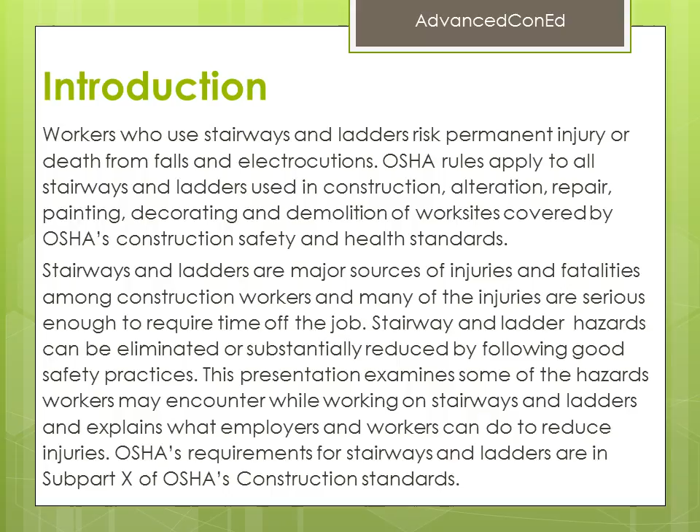Introduction continued. Falls from portable ladders - step, straight, combination, and extension - are one of the leading causes of occupational fatalities and injuries. Read and follow all labels and markings on the ladder. Avoid electrical hazards: look for overhead power lines before handling a ladder, and avoid using a metallic ladder near power lines or exposed energized electrical equipment.

Always inspect the ladder prior to using it. If the ladder is damaged, it must be removed from service and tagged until repaired or discarded. Do not use a self-supporting ladder, for example a step ladder, as a single ladder or in a partially closed position. Do not use the top step or rung of a ladder as a step or rung unless it was designed for that purpose.

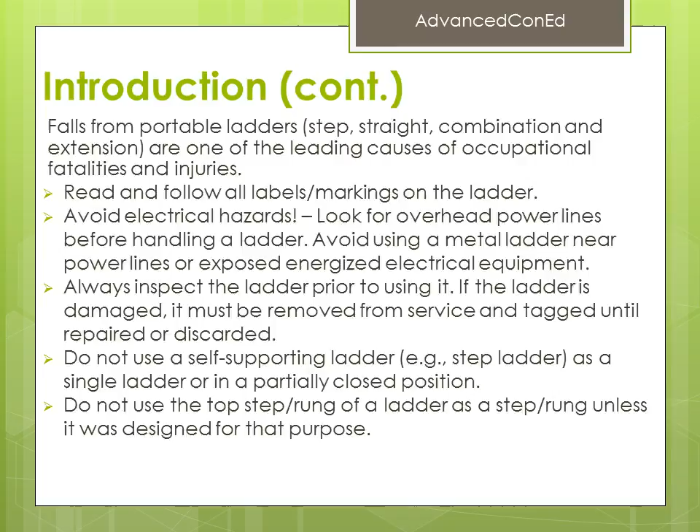Training requirements. Employers must train all employees to recognize hazards related to ladders and stairways and instruct them to minimize these hazards. For example, employers must ensure that each employee is trained by a competent person in the following areas, as applicable.

Nature of fall hazards in the work area; correct procedures for erecting, maintaining, and disassembling the fall protection systems to be used; proper construction, use, placement, and care and handling of all stairways and ladders; and maximum intended load carrying capacities of ladders used. Note: employers must retrain each employee as necessary to maintain their understanding and knowledge on safe use and construction of ladders and stairs.

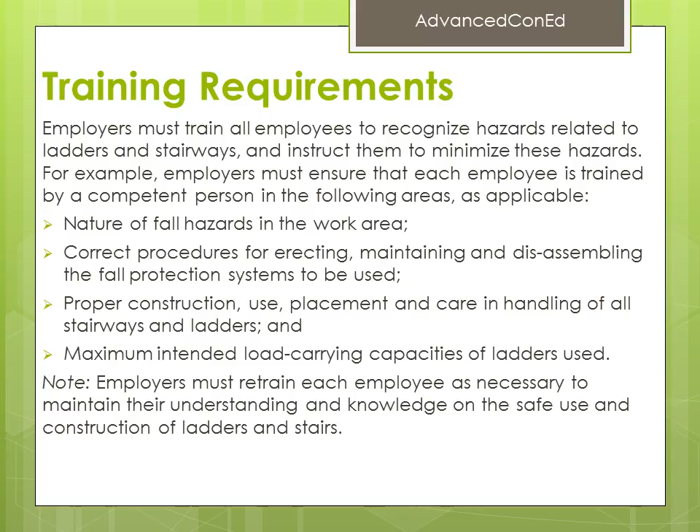Glossary. Cleat: a ladder crosspiece of rectangular cross-section placed on edge upon which a person may step while ascending or descending a ladder. Double cleat ladder: a ladder with a center rail to allow simultaneous two-way traffic for employees ascending or descending. Failure: load refusal, breakage, or separation of components.

Fixed ladder: a ladder that cannot be readily moved or carried because it is an integral part of a building or structure. Handrail: a rail used to provide employees with a handhold for support. Job-made ladder: a ladder that is fabricated by employees, typically at the construction site, non-commercially manufactured. Load refusal: the point where the structural members lose their ability to carry the load.

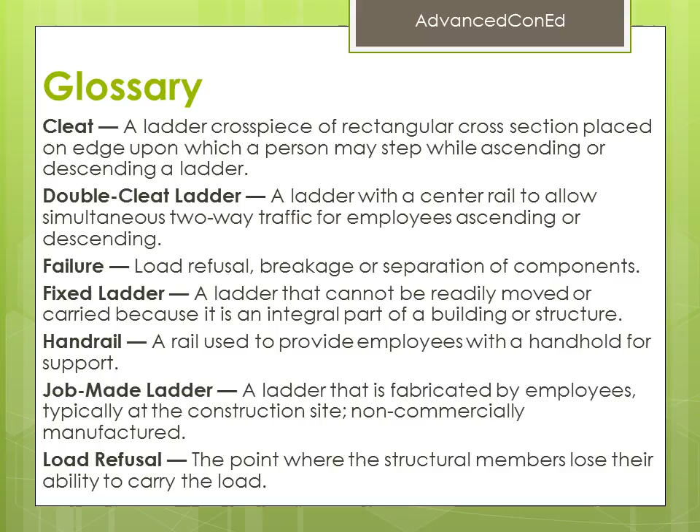Glossary continued. Point of access: all areas used by employees for work-related passage from one area or level to another. Portable ladder: a ladder that can be readily moved or carried. Riser height: the vertical distance from the top of a tread or platform/landing to the top of the next higher tread or platform/landing.

Sidestep fixed ladder: a fixed ladder requiring a person to step to the side of the ladder side rails to reach the landing. Single cleat ladder: a ladder consisting of a pair of side rails connected together by cleats, rungs, or steps. Stair rail system: a vertical barrier erected along the unprotected sides and edges of a stairway to prevent employees from falling to lower levels.

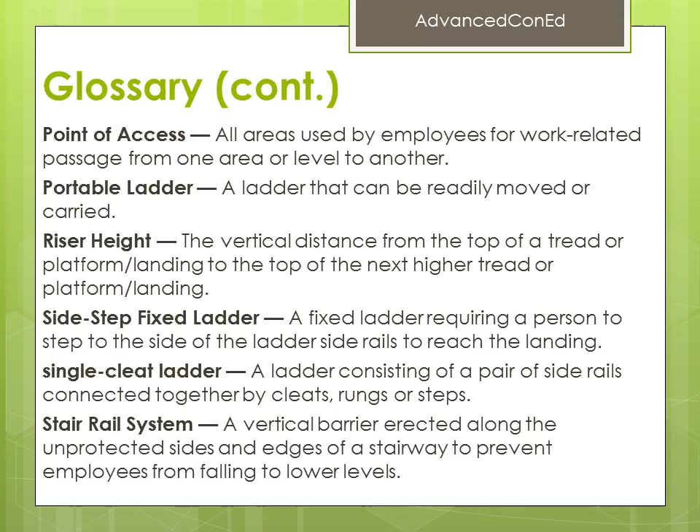Glossary continued. Temporary service stairway: a stairway where permanent treads and landings are to be filled in at a later date. Through fixed ladder: a fixed ladder that requires a person getting off at the top to step between the side rails of the ladder to reach the landing. Tread depth: the horizontal distance from the front to back of a tread, excluding nosing, if any.

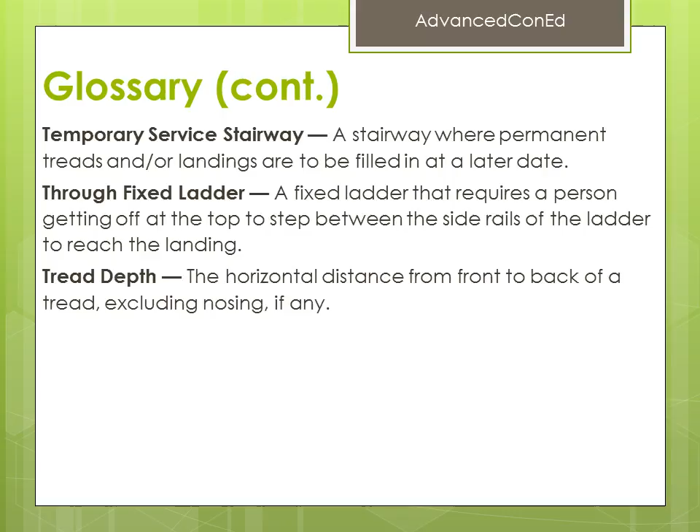General requirements. These rules specify when employers must provide stairways and ladders. In general, the standards require the following: when there is a break in elevation of 19 inches or more and no ramp, runway, embankment, or personnel hoist is available, employers must provide a stairway or ladder at all worker points of access.

When there is only one point of access between levels, employers must keep it clear of obstacles to permit free passage by workers. If free passage becomes restricted, employers must provide a second point of access and ensure that workers use it. When there are more than 2 points of access between levels, employers must ensure that at least one point of access remains clear.

Employers must install all stairway and ladder fall protection systems required by these rules and ensure that the worksite meets all requirements of the stairway and ladder rules before employees use stairways or ladders.

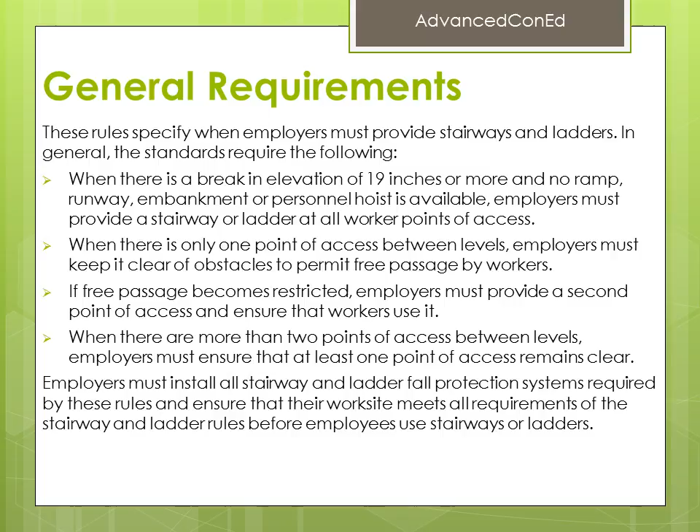General requirements continued. The following general requirements apply to all ladders, including ladders built at the job site. Double cleated ladders or 2 or more ladders must be provided when ladders are the only way to enter or exit a work area where 25 or more employees work, or when a ladder services simultaneous two-way traffic. Ladder rungs, cleats, and steps must be parallel, level, and uniformly spaced when the ladder is in position for use.

Rungs, cleats, and steps of portable and fixed ladders, except as provided below, must not be spaced less than 10 inches apart, nor more than 14 inches apart along the ladder's side rails. Rungs, cleats, and steps of step stools must not be less than 8 inches apart, nor more than 12 inches apart, between the center lines of the rungs, cleats, and steps.

Rungs, cleats, and steps at the base section of extension trestle ladders must not be less than 8 inches nor more than 18 inches apart between the center lines of the rungs, cleats, and steps. The rung spacing on the extension section must not be less than 6 inches nor more than 12 inches.

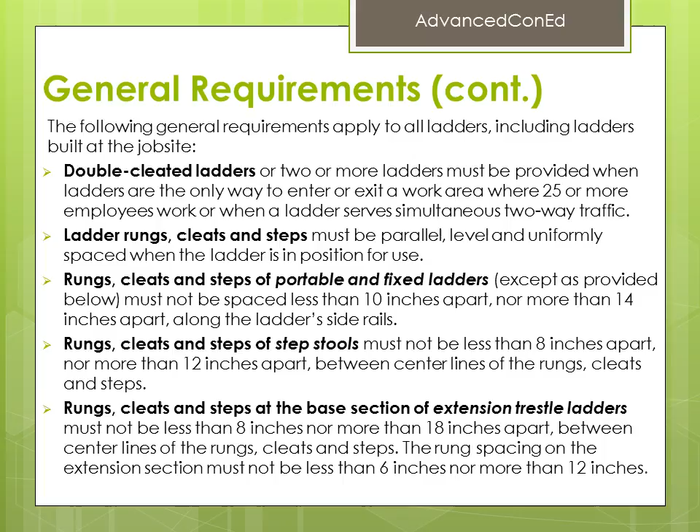General requirements continued. The following general requirements apply to all ladders, including ladders built at the job site. Double cleated ladders or two or more ladders must be provided when ladders are the only way to enter or exit a work area where 25 or more employees work, or when a ladder serves simultaneous two-way traffic. Ladder rungs, cleats, and steps must be parallel, level, and uniformly spaced when the ladder is in position for use.

Rungs, cleats, and steps of portable and fixed ladders, except as provided below, must not be spaced less than 10 inches apart, nor more than 14 inches apart along the ladder's side rails. Rungs, cleats, and steps of step stools must not be less than 8 inches apart, nor more than 12 inches apart, between the center lines of the rungs, cleats, and steps.

Rungs, cleats, and steps at the base section of extension trestle ladders must not be less than 8 inches nor more than 18 inches apart between the center lines of the rungs, cleats, and steps. The rung spacing on the extension section must not be less than 6 inches nor more than 12 inches.

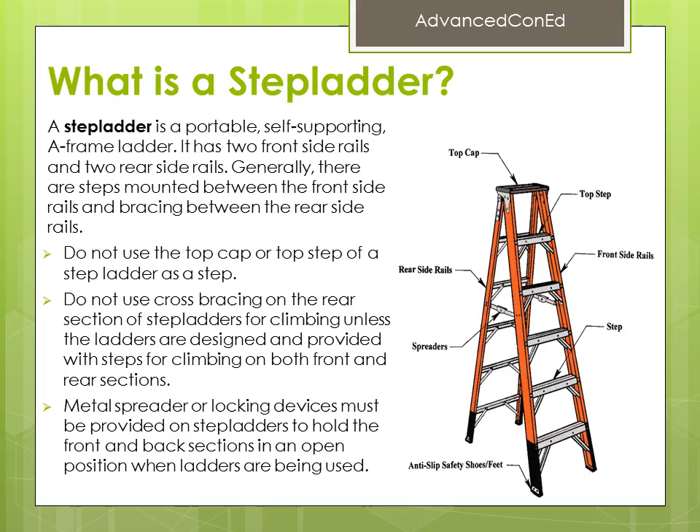Common stepladder hazards: damaged stepladder, ladders on slippery or unstable surface, unlocked ladder spreaders, standing on the top step or top cap, loading a ladder beyond rated load, ladders in high traffic location, reaching outside ladder side rails, ladders in close proximity to electrical wiring or equipment.

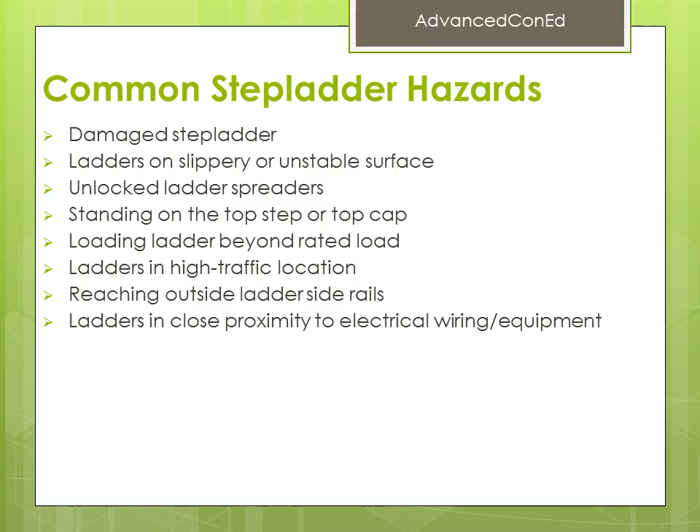What is an extension ladder? Also known as portable ladders, extension ladders usually have two sections that operate in brackets or guides, allowing for adjustable lengths. Because extension ladders are not self-supporting, they require a stable structure that can withstand the intended load.

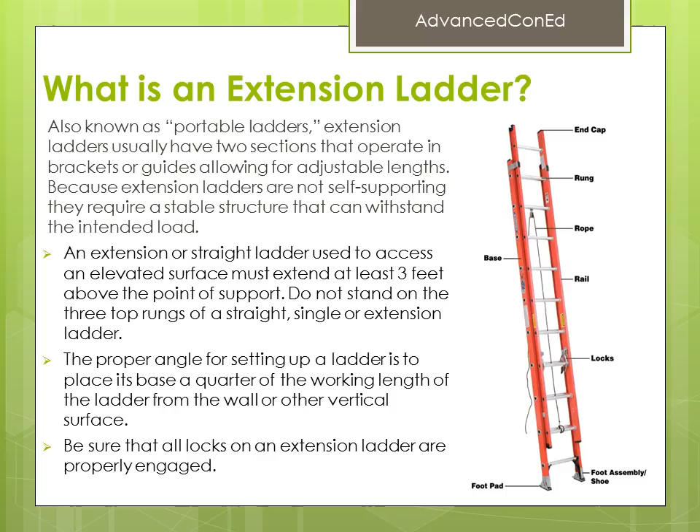An extension or straight ladder used to access an elevated surface must extend at least 3 feet above the point of support. Do not stand on the top 3 rungs of a straight, single, or extension ladder. The proper angle for setting up a ladder is to place its base a quarter of the working length of the ladder from the wall or other vertical surface. Be sure that all locks on an extension ladder are properly engaged.

Common extension ladder hazards: damaged cleat or rail, ladders placed on slippery or unstable surface, not extending the ladder 3 feet above the landing surface, not properly setting the ladder with its base a quarter of the working length of the ladder from the wall or other vertical surface.

Unsecured locks. Standing on the top 3 cleats. Loading ladder beyond rated load. Ladders in high traffic locations. Reaching outside ladder side rails. Ladders in close proximity to electrical wiring or equipment.

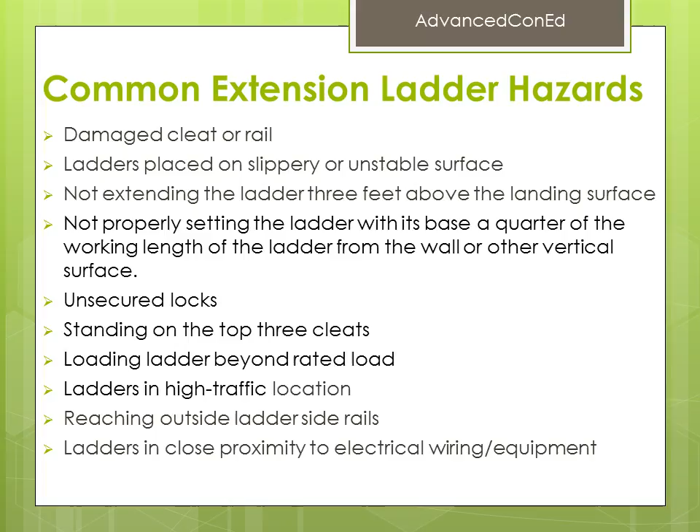Rules for ladders. All ladders. The following rules apply to all ladders. Do not use single rail ladders. Maintain ladders free of oil, grease, and other slipping hazards. Do not load ladders beyond their maximum intended load, nor beyond their manufacturer's rated capacity.

Use ladders only for their designed purpose. Use ladders only on stable and level surfaces, unless secured to prevent accidental movement. Do not use ladders on slippery surfaces unless secured or provided with slip-resistant feet to prevent accidental movement. Do not use slip-resistant feet as a substitute for exercising care when placing, lashing, or holding a ladder upon slippery surfaces.

Secure ladders placed in areas such as passageways, doorways, or driveways, or where they can be displaced by workplace activities or traffic, to prevent accidental movement. Or use a barricade to keep traffic or activity away from the ladder.

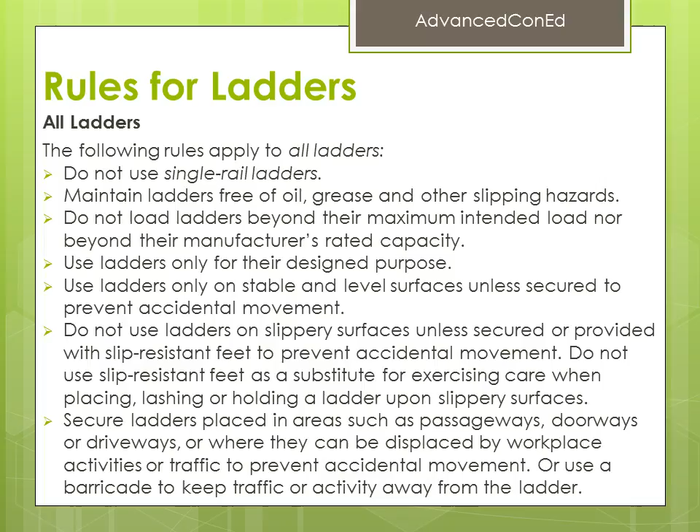Rules for ladders continued. Keep areas clear around the top and bottom of ladders. Use ladders equipped with non-conductive side rails if the worker or the ladder could contact exposed energized electrical equipment. Face the ladder when moving up or down. Use at least one hand to grasp the ladder when climbing. Do not carry objects or loads that could cause a loss of balance and falling. Use ladders and appropriate accessories only for their designed purposes.

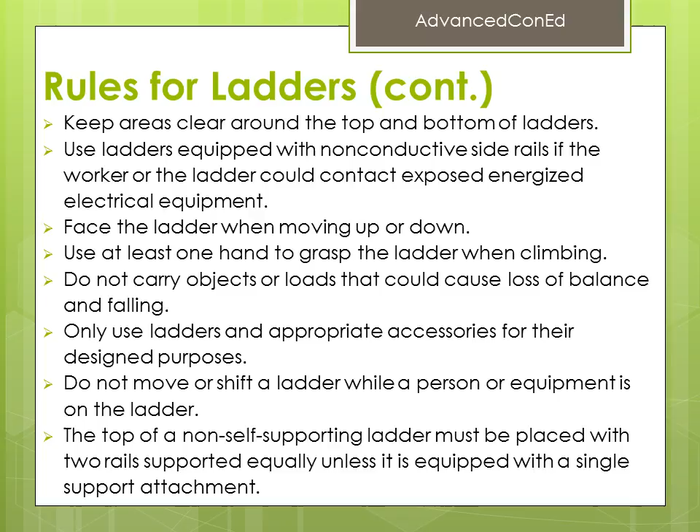Do not move or shift a ladder while a person or equipment is on the ladder. The top of a non-self-supporting ladder must be placed with 2 rails supported equally, unless it is equipped with a single support attachment.

Rules for ladders continued. Ladders must not be tied or fastened together to create longer sections unless they are specifically designed for such use. When splicing side rails, the resulting side rail must be equivalent in strength to a one-piece side rail made of the same material.

2 or more separate ladders used to reach an elevated work area must be offset with a platform or landing between the ladders, except when portable ladders are used to gain access to fixed ladders. Ladder components must be surfaced to prevent snagging of clothing and injury from punctures or lacerations.

Wood ladders must not be coated with any opaque covering except for identification or warning labels, which may be placed only on the face of a side rail. A competent person must inspect ladders for visible defects periodically and after any incident that could affect their safe use.

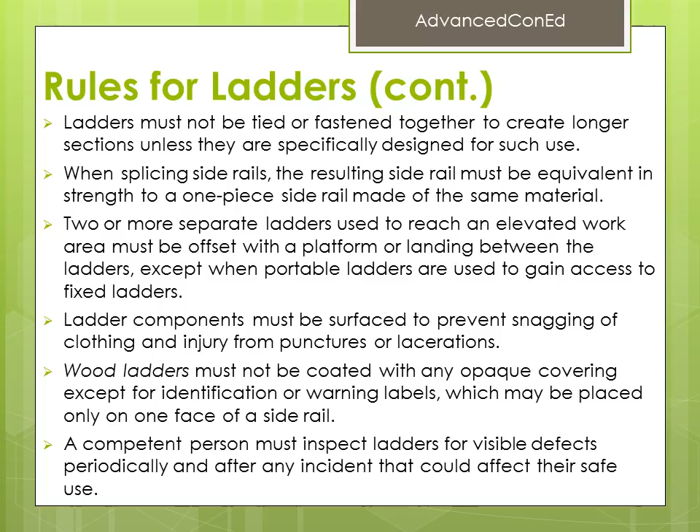Rules for ladders continued. The minimum clear distance between side rails for all portable ladders is 11.5 inches. The rungs and steps of portable metal ladders must be corrugated, knurled, dimpled, coated with a skid-resistant material, or treated to minimize slipping.

Non-self-supporting and self-supporting portable ladders must support at least 4 times the maximum intended load. Extra heavy-duty type 1A metal or plastic ladders must sustain 3.3 times the maximum intended load.

When portable ladders are used for access to an upper landing surface, the side rails must extend at least 3 feet above the upper landing surface. When such an extension is not possible, the ladder must be secured and a grasping device such as a grab rail must be provided to assist workers in mounting and dismounting the ladder. A ladder extension must not deflect under a load that would cause the ladder to slip off its supports.

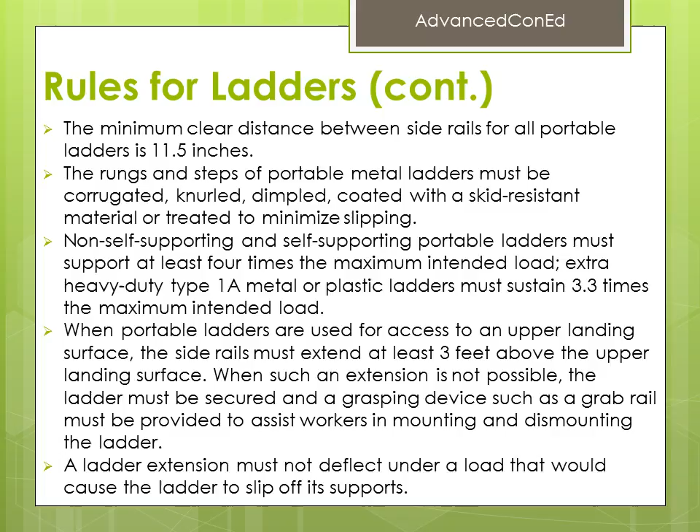Rules for ladders continued. Fixed ladders. If the total length of the climb on a fixed ladder equals or exceeds 24 feet, the ladder must be equipped with ladder safety devices or self-retracting lifelines and rest platforms at intervals not to exceed 150 feet, or a cage or well and multiple ladder sections, with each ladder section not to exceed 50 feet in length.

These ladder sections must be offset from adjacent sections, and landing platforms must be provided at maximum intervals of 50 feet. In addition, fixed ladders must meet the following requirements. Fixed ladders must be able to support at least 2 loads of 250 pounds each, concentrated between any 2 consecutive attachments. Fixed ladders must also support added anticipated loads caused by ice buildup, winds, rigging, and impact loads resulting from ladder safety devices.

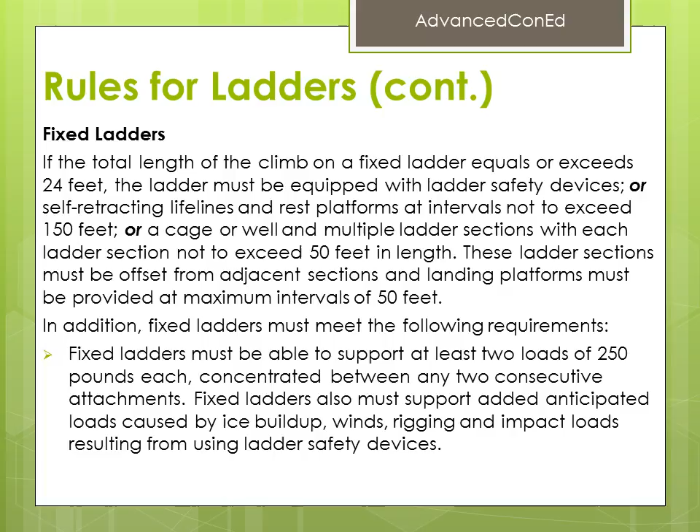Rules for ladders continued. Fixed ladders continued. Individual rung/step ladders must extend at least 42 inches above an access level or landing platform, either by the continuation of the rung spacing as horizontal grab bars or by providing vertical grab bars that must have the same lateral spacing as the vertical legs of the ladder rails.

Each step or rung of a fixed ladder must be able to support a load of at least 250 pounds applied in the middle of the step or rung. Minimum clear distance between the sides of individual rung/step ladders and between the side rails of other fixed ladders must be 16 inches. Rungs of individual rung/step ladders must be shaped to prevent slipping off the end of the rungs.

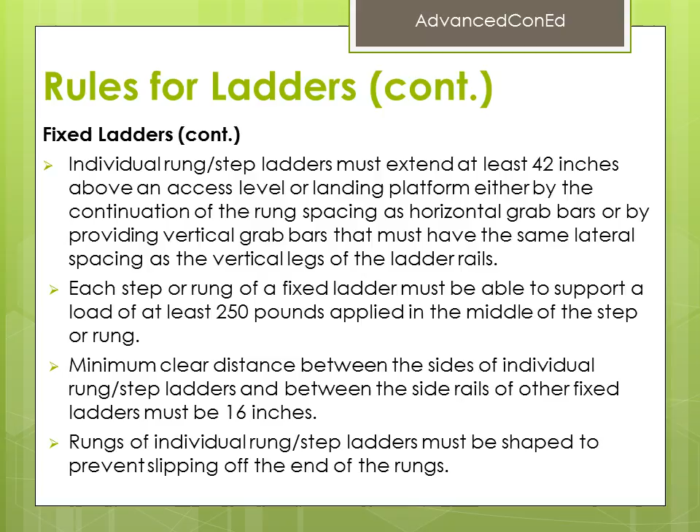Rules for ladders continued. Fixed ladders continued. Rungs and steps of fixed metal ladders must be corrugated, knurled, dimpled, coated with skid-resistant material, or treated to minimize slipping.

Minimum perpendicular clearance between fixed ladder rungs, cleats, and steps and any obstructions behind the ladder must be 7 inches, except that the clearance for an elevator pit ladder must be 4.5 inches.

Minimum perpendicular clearance between the center line of fixed ladder rungs, cleats, and steps and any obstruction on the climbing side of the ladder must be 30 inches. If obstructions are unavoidable, clearance may be reduced to 24 inches, provided a deflection device is installed to guide the worker around the obstruction.

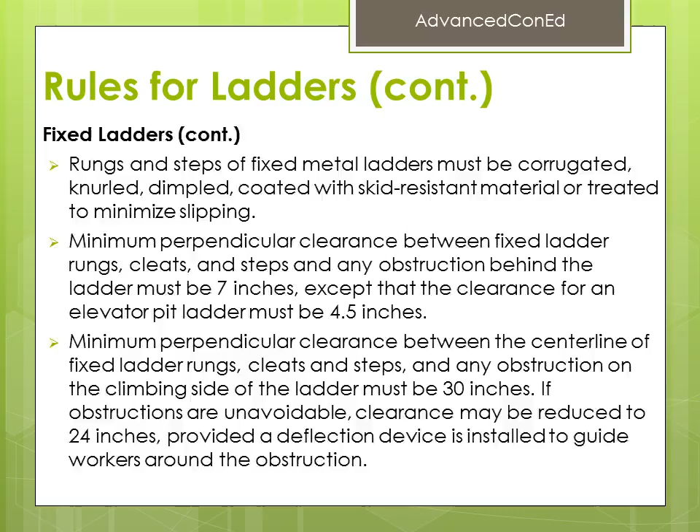Rules for ladders continued. Fixed ladders continued. Step across distance between the center of the steps or rungs of fixed ladders and the nearest edge of a landing area must be no less than 7 inches and no more than 12 inches. A landing platform must be provided if the step across distance exceeds 12 inches.

Fixed ladders without cages or wells must have at least a 15-inch clearance width to the nearest permanent object on each side of the center line of the ladder.

Fixed ladders must be provided with cages, wells, ladder safety devices, or self-retracting lifelines where the length of the climb is less than 24 feet, but the top of the ladder is at a distance greater than 24 feet above the lower levels.

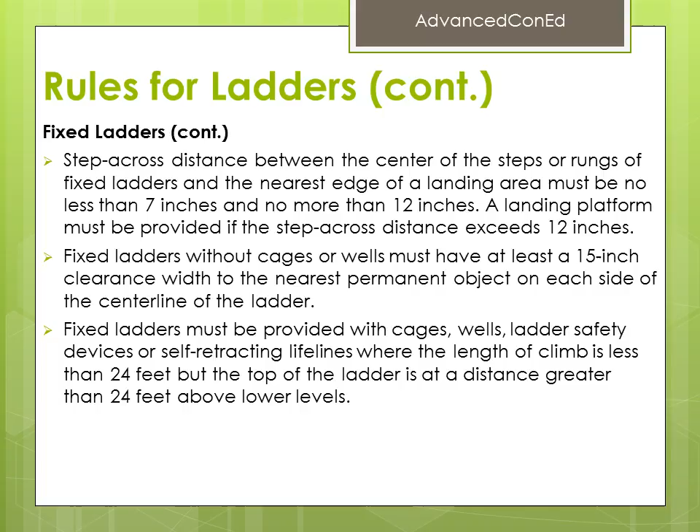Rules for ladders, continued. Fixed ladders, continued. Parapet ladders must have an access level at the roof if the parapet is cut to permit passage through it. If the parapet is continuous, the access level is the top of the parapet.

Steps or rungs for through fixed ladder extensions must be omitted from the extension, and the extension of the side rails must be flared to provide between 24 inches and 30 inches clearance between the side rails. When safety devices are provided, the maximum clearance distance between the side rail extensions must not exceed 36 inches.

Fixed ladders must be used at a pitch no greater than 90 degrees from the horizontal, measured from the back side of the ladder.

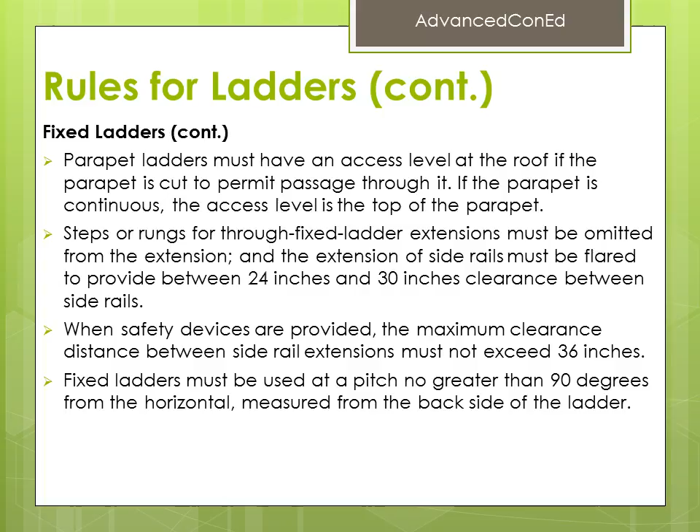Cages for fixed ladders. The requirements for cages for fixed ladders are as follows. Horizontal bands must be fastened to the side rails of rail ladders or directly to the structure, building, or equipment for individual rung ladders. Vertical bars must be on the inside of the horizontal bands and must be fastened to them.

Cages must not extend less than 27 inches or more than 30 inches from the center line of the step or rung and must not be less than 27 inches wide. Insides of cages must be clear of projections.

Horizontal bands must be spaced at intervals not more than 4 feet apart, measured from the center line to center line.

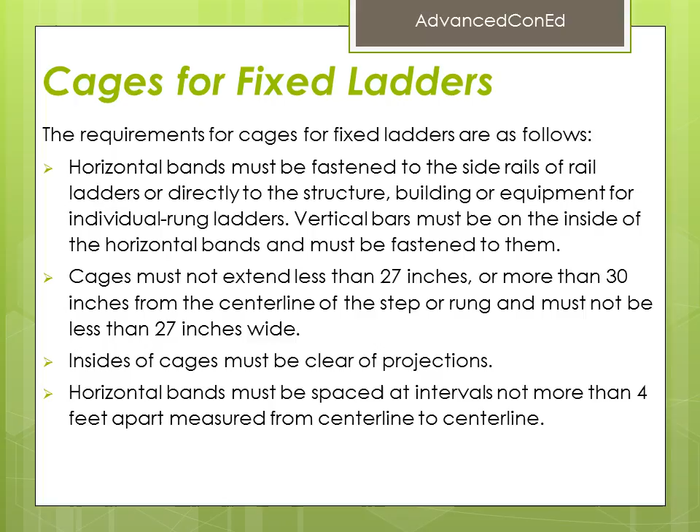Cages for fixed ladders, continued. Vertical bars must be spaced at intervals not more than 9.5 inches, measured center line to center line.

Bottoms of cages must be between 7 feet and 8 feet above the point of access to the bottom of the ladder. The bottom of the cage must be flared not less than 4 inches between the bottom horizontal band and the next higher band.

Tops of cages must be a minimum of 42 inches above the top of the platform or point of access at the top of the ladder. There must be a way to access the platform or other point of access.

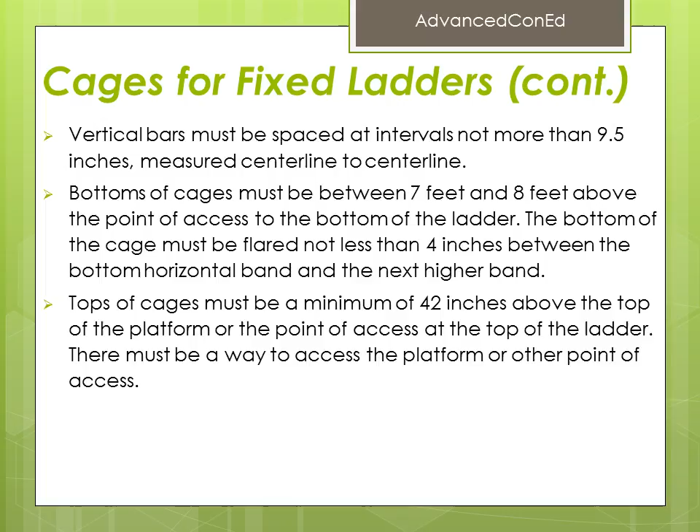Wells for fixed ladders. The requirements for wells for fixed ladders are as follows. Wells must completely encircle the ladder and must be free of projections. Inside faces of wells on the climbing side of the ladder must extend between 27 inches and 30 inches from the center line of the step or rung.

Inside widths of wells must be at least 30 inches. Bottoms of wells above the point of access to the bottom of the ladder must be between 7 feet and 8 feet.

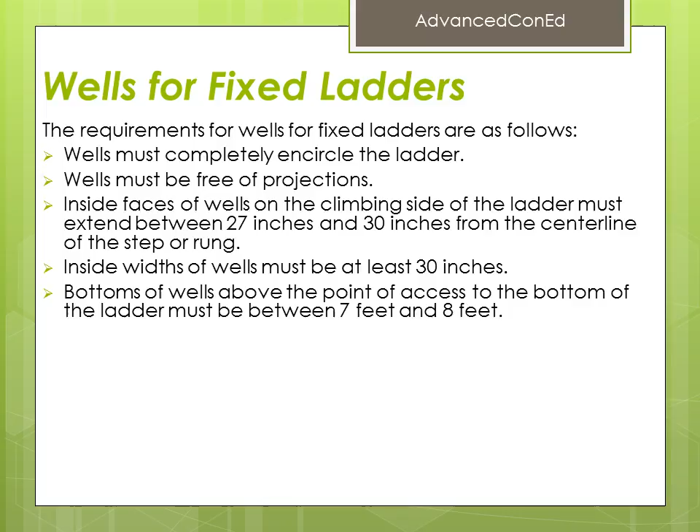Ladder safety devices and related support systems for fixed ladders. The connection between the carrier or lifeline and the point of attachment to the body belt or harness must not exceed 9 inches in length.

In addition, ladder safety devices and related support systems on fixed ladders must conform to the following. All safety devices must be able to withstand, without failure, a drop test consisting of a 500-pound weight dropping 18 inches. All safety devices must permit the worker to ascend or descend without continually having to hold, push, or pull any part of the device, leaving both hands free for climbing.

All safety devices must be activated within 2 feet after a fall occurs and limit the descending velocity of an employee to 7 feet per second or less.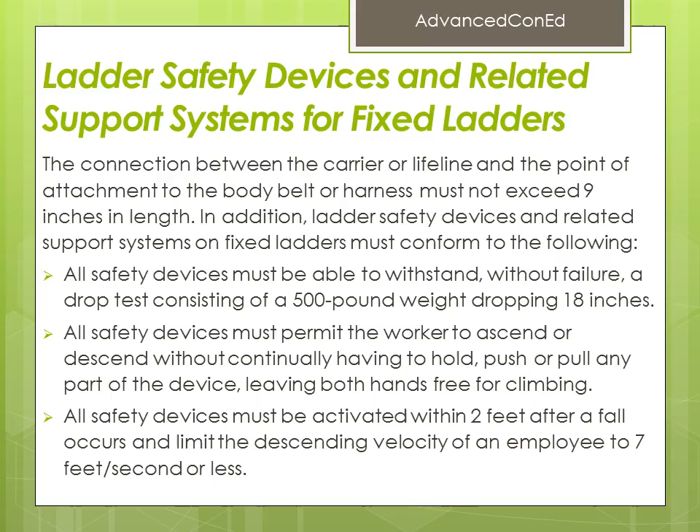Requirements for mounting ladder safety devices for fixed ladders are as follows. Mounting for rigid carrier must be attached at each end of the carrier, with intermediate mounting spaced along the entire length of the carrier to provide the necessary strength to stop workers' falls.

Mounting for flexible carriers must be attached at each end of the carrier. Cable guides for flexible carriers must be installed with a spacing between 25 feet and 40 feet along the entire length of the carrier to prevent wind damage to the system.

Design and installation of mountings and cable guides must not reduce the strength of the ladder. Side rails and steps or rungs for side step fixed ladders must be continuous in extension.

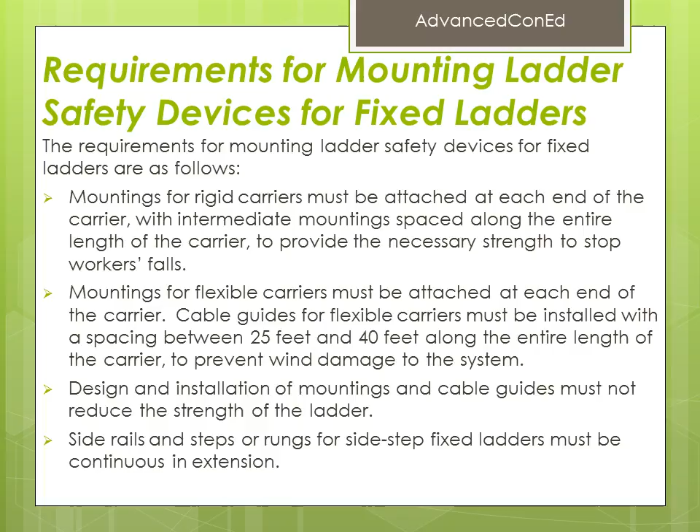Defective ladders. Ladders needing repairs are subject to the following rules. Portable ladders with structural defects, such as broken or missing rungs, cleats, or steps, broken or split rails, corroded components, or other faulty or defective components, must be immediately marked as defective or tagged with "Do Not Use" or similar language and withdrawn from service until repaired.

Fixed ladders with structural defects, such as broken or missing rungs, cleats, or steps, broken or split rails, or corroded components, must be withdrawn from service until repaired.

Defective fixed ladders are considered withdrawn from use when they are immediately tagged with "Do Not Use" or similar language, or marked in a manner that identifies them as defective or blocked, such as with a plywood attachment that spans several rungs.

Ladder repairs must restore the ladder to a condition meeting its original design criteria before the ladder is returned to use.

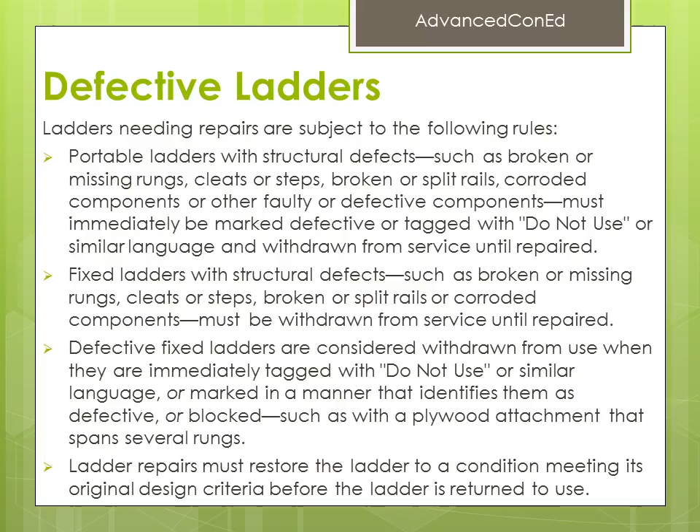Rules for stairways. The rules covering stairways and their components generally depend on how and when stairs are used. Specifically, there are rules for stairs used during construction and stairs used temporarily during construction, as well as rules governing stair rails and handrails.

Stairways used during construction. The following requirements apply to all stairways used during construction. Stairways that will not be a permanent part of the building under construction must have landings at least 30 inches deep and 22 inches wide at every 12 feet or less of vertical rise. Stairways must be installed between 30 degrees and 50 degrees from the horizontal.

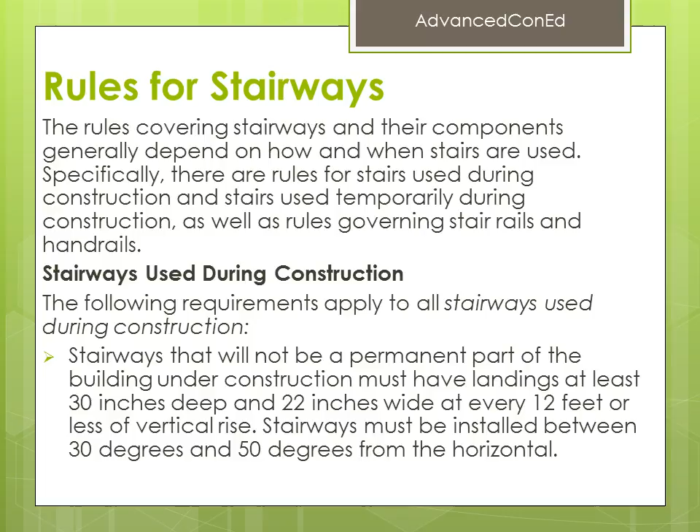Rules for stairways continued. Stairways used during construction continued. Variation in riser height or stair tread depth must not exceed 1/4 inch in any stairway system, including any foundation structure used as one or more treads of the stairs.

Doors and gates opening directly onto a stairway must have a platform that extends at least 20 inches beyond the swing of the door or gate. Metal pan landings and metal pan treads must be secured in place before filling.

Stairway parts must be free of dangerous projections, such as protruding nails. Slippery conditions on stairways must be corrected. Workers must not use spiral stairways that will not be part of a permanent part of the structure.

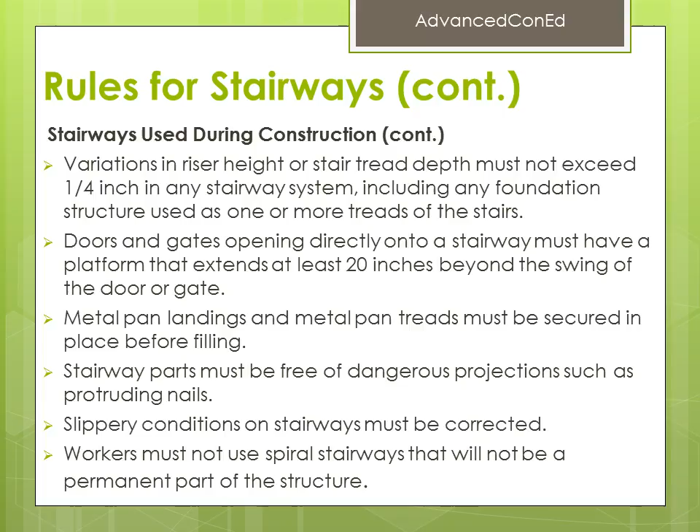Rules for stairways continued. Temporary stairs. The following requirements apply to stairways used temporarily during construction. Except during construction of the stairway, do not use stairways with metal pan landings or treads if the treads and/or landings have not been filled in with concrete or other materials, unless the pans of the stairs and/or landings are temporarily filled in with wood or other materials.

All treads and landings must be replaced when worn below the top edge of the pan. Do not use skeleton metal frame structures and steps where the treads and/or landings will be installed later, unless the stairs are fitted with secured temporary treads or landings.

Note: temporary treads must be made of wood or other solid material and installed full width and depth of the stair.

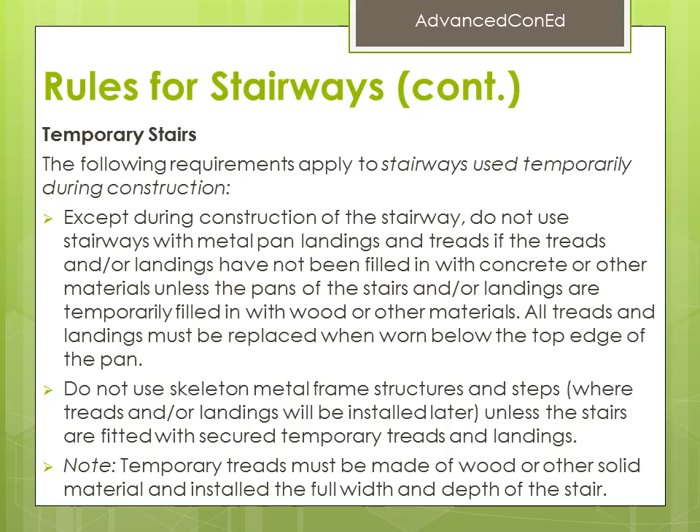Rules for stairways continued. Stair rails. The following general requirements apply to all stair rails. Stairways with 4 or more risers or rising more than 30 inches in height, whichever is less, must have a stair rail system installed along each unprotected side or edge.

Stair rails must not be less than 36 inches in height. The top edge of a handrail must be between 36 inches and 37 inches from the upper surface of the tread.

Stair rail systems and handrails must be surfaced to prevent injuries such as punctures or lacerations and to keep clothing from snagging.

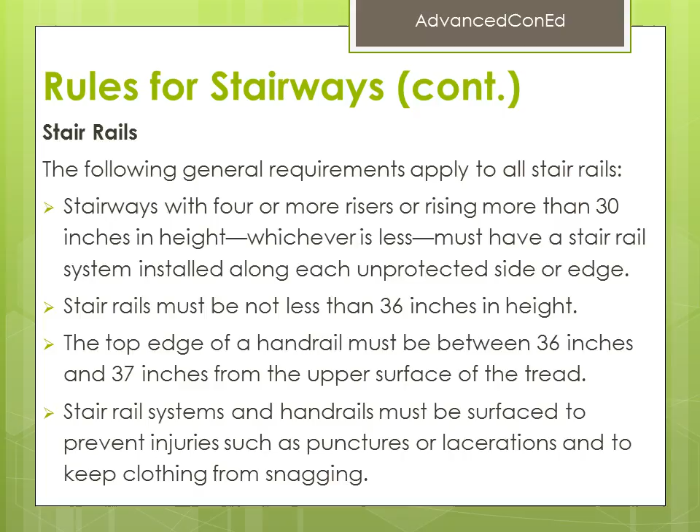Rules for stairways continued. Stair rails continued. The ends of stair rail systems and handrails must be built to prevent dangerous projections such as rails protruding beyond the end post of the system.

Unprotected sides and edges of stairway landings must have standard 42-inch guardrail systems. Intermediate vertical members, such as balusters used as guardrails, must not be more than 19 inches apart. Other intermediate structural members, when used, must be installed so that no openings are more than 19 inches wide.

Screens or mesh, when used, must extend from the top rail to the stairway step and along the opening between the top rail supports.

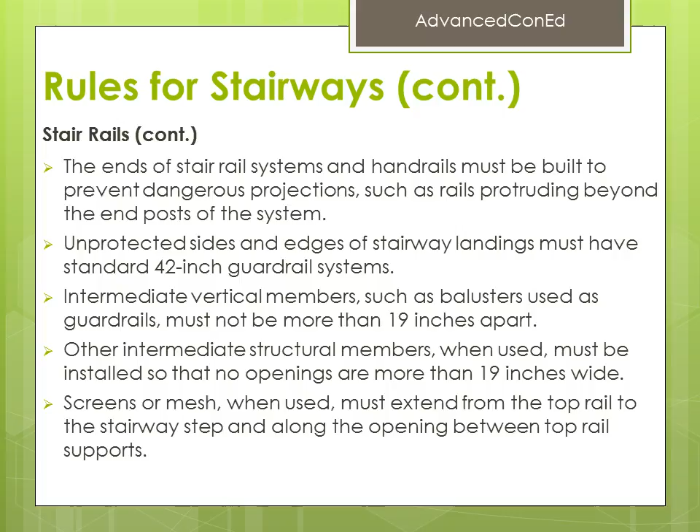Rules for stairways continued: handrails. Requirements for handrails are as follows.

Handrails and top rails of stair rail systems must be able to withstand, without failure, at least 200 pounds of force applied within 2 inches of the top edge in any downward or outward direction at any point along the top edge.

Handrails must not be more than 37 inches high, nor less than 30 inches from the upper surface of the handrail to the surface of the tread.

Handrails must provide an adequate handhold for employees to grasp to prevent falls. Temporary handrails must have a minimum clearance of 3 inches between the handrail and walls, stair rail systems, and other objects.

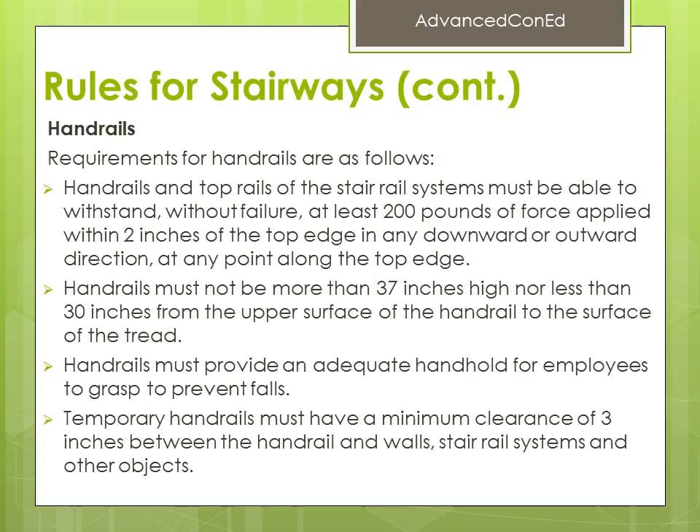Rules for stairways continued: handrails continued. Stairways with 4 or more risers, or that rise more than 30 inches in height, whichever is less, must have at least one handrail. Winding or spiral stairways must have a handrail to prevent use of areas where the tread width is less than 6 inches.

Midrails. Midrails, screens, mesh, intermediate vertical members, or equivalent intermediate structural members must be provided between the top rail and stairway steps to the stair rail system. When midrails are used, they must be located midway between the top of the stair rail system and the stairway steps.

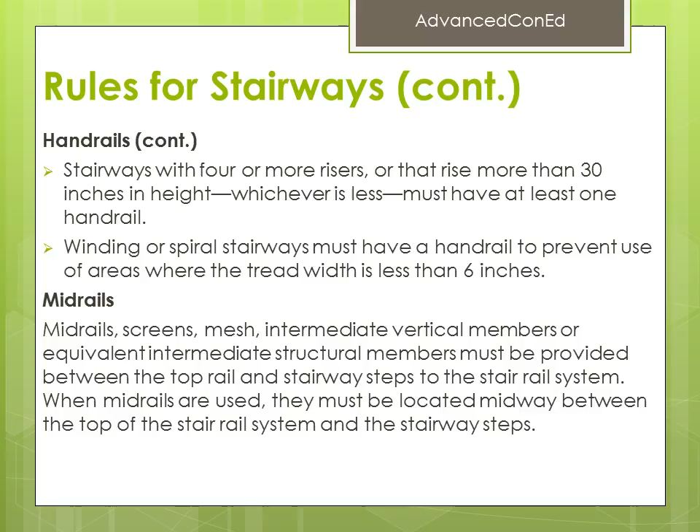Select the right ladder for the job. Select a ladder based on the expected load—your weight plus the weight of all your tools, materials, and equipment—the type of work to be done, and the correct height.

There are 5 categories of ladder duty ratings, and always follow the manufacturer's instructions and labels on the ladder. For example, a Type 1A ladder has an extra duty rating. Its use is industrial and has a load capacity of 300 pounds.

A Type 2 ladder is a medium duty ladder used in commercial applications and has a load rating of 225 pounds.

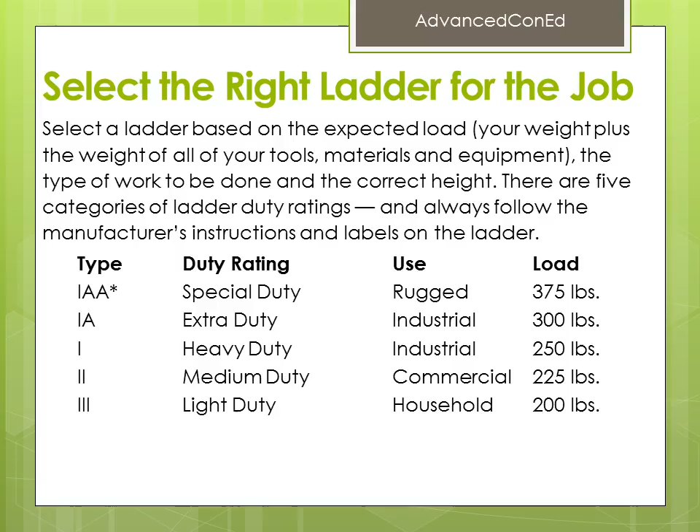Safety summary: use a ladder that can sustain the maximum intended load. Follow the manufacturer's instructions and labels on the ladder. To determine the correct ladder, consider your weight plus the weight of your load. Do not exceed the load rating and always include the weight of all tools, materials, and equipment.

Allow sufficient room to step off the ladder safely. Keep the area around the bottom and the top of the ladder clear of equipment, materials, and tools. If access is obstructed, secure the top of the ladder to a rigid support that will not deflect, and add a grasping device to allow workers safe access.

Set a portable ladder at the proper angle. When a portable ladder is leaned against a wall, the bottom of the ladder should be 1/4 of the ladder's working length away from the wall, and extend the top of the ladder 3 feet above that surface, or secure the ladder at its top.

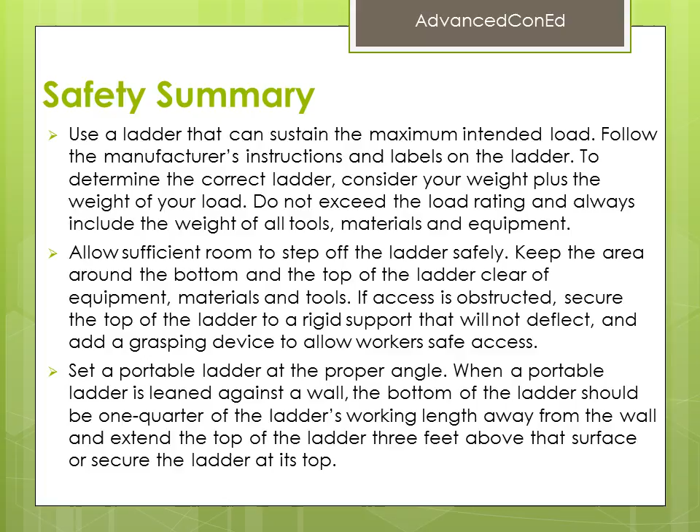Safety summary continued: before starting work, survey the area for potential hazards, such as energized overhead power lines. Ladders shall have non-conductive side rails if they are used where the worker or the ladder can contact exposed energized electrical equipment.

Keep all ladders and other tools at least 10 feet away from any power lines. Set the base of the ladder so that the bottom sits securely and both side rails are evenly supported. The ladder rails should be squared to the structure against which it is leaning, with both foot pads placed securely on a stable and level surface.

When using a ladder in a high activity area, secure it to prevent movement and use a barrier to redirect workers and equipment. If the ladder is placed in front of a door, always block off the door.

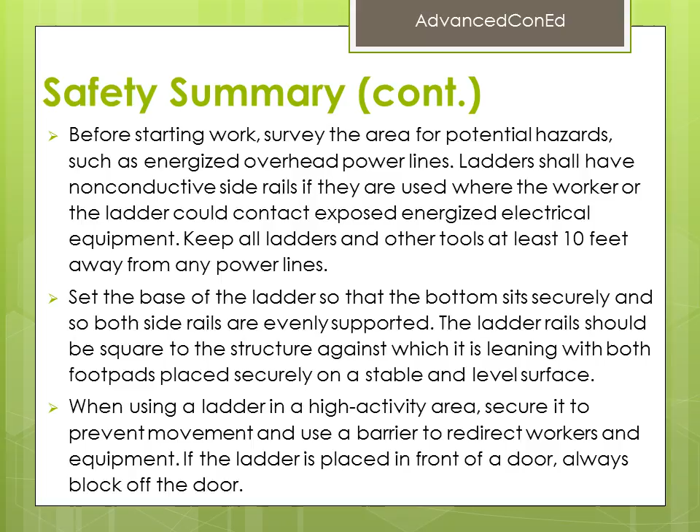Safety summary continued: a competent person must visually inspect ladders for defects on a periodic basis and after any occurrence that could affect their safe use. Defects include, but are not limited to, structural damage, split or bent side rails, broken or missing rungs, steps, or cleats, loose components, and missing or damaged safety devices.

Grease, dirt, or other contaminants that could cause slips or falls. Paint or stickers, except warning or safety labels, that could hide possible defects. Where a ladder has these or other defects, it must be immediately marked as defective or tagged with 'Do Not Use' or similar language.